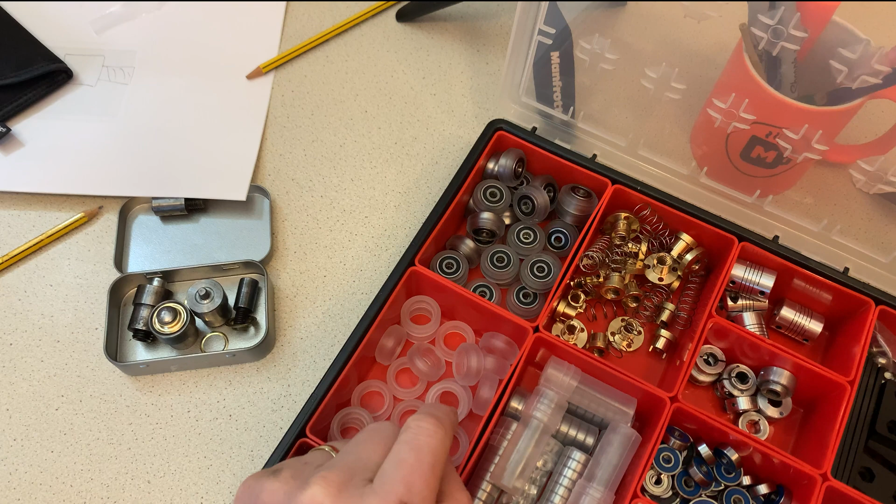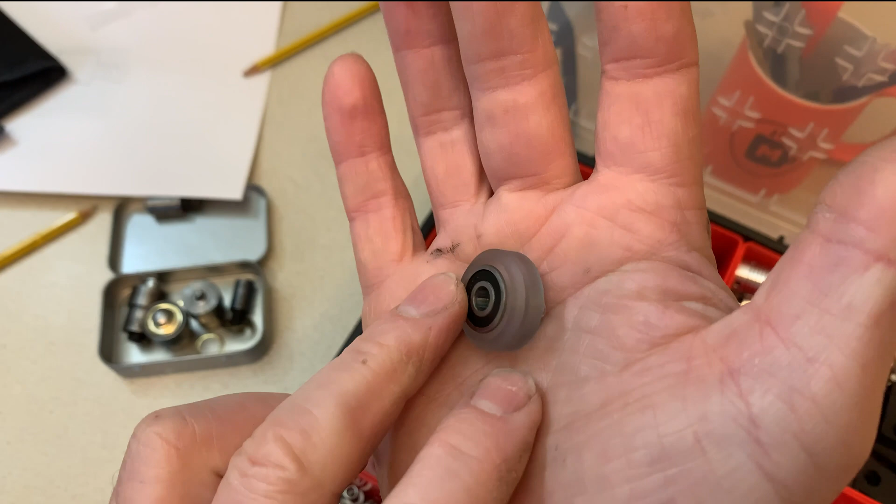You may have seen in an earlier video I'm making a small CNC mill, so I'm getting the bits together. Ultimately some of these wheels will be used on the device, and they comprise of a plastic wheel like such.

Very hard plastic, a couple of bearings - get these out of a box, there you go, a couple of bearings. And what I'm told is called a precision shim. Basically it's a 1mm thick washer, but not just pressed steel, it's precision, shall we say. It's 1mm, and that goes between the two bearings in the wheel. I'll show you how they suggest you put it together.

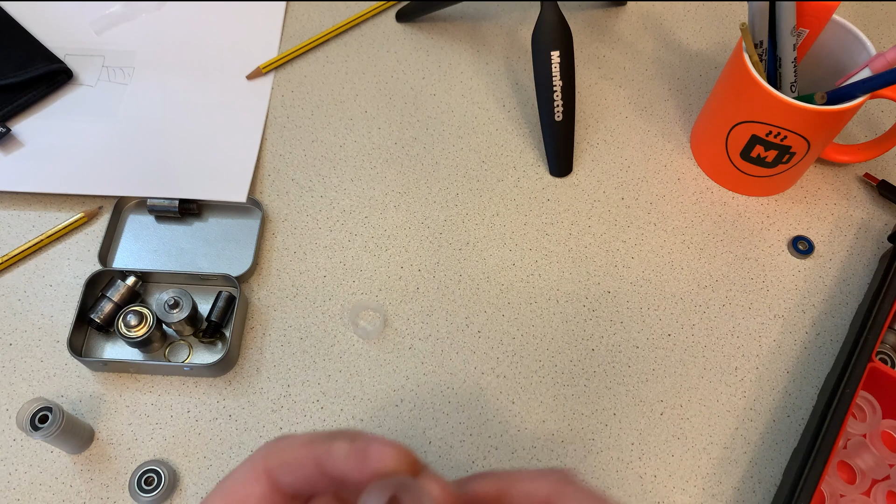Let me move that out the way a tad. Right, one bearing, one wheel. Let's get a little bit closer for you. Right, they tell me you put the bearing on the deck, wheel on the top, press down. That seats the bearing in, which is all well and good.

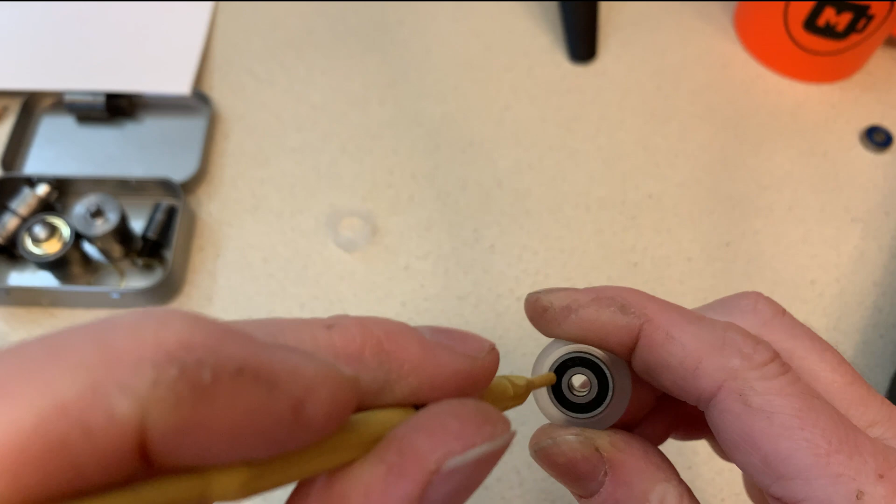Precision shim in next, then another bearing straight on the top. Ow! And with a great deal of pushing it all clips in, all very nice. The shim in the middle normally goes a little bit astray, but that's easy enough to straighten up with a screwdriver or some other pointy instrument - push it to the center and push down again. That's one wheel made up.

Now I've made 24 wheels up and I nearly had broken thumbs. It really is a lot of pressure to push down on there. The plan is, I've had a few little inquiries about making the CNC mill, not on a business level, but making a few for friends who've inquired. So I'm going to have more than a couple of dozen of these to press out.

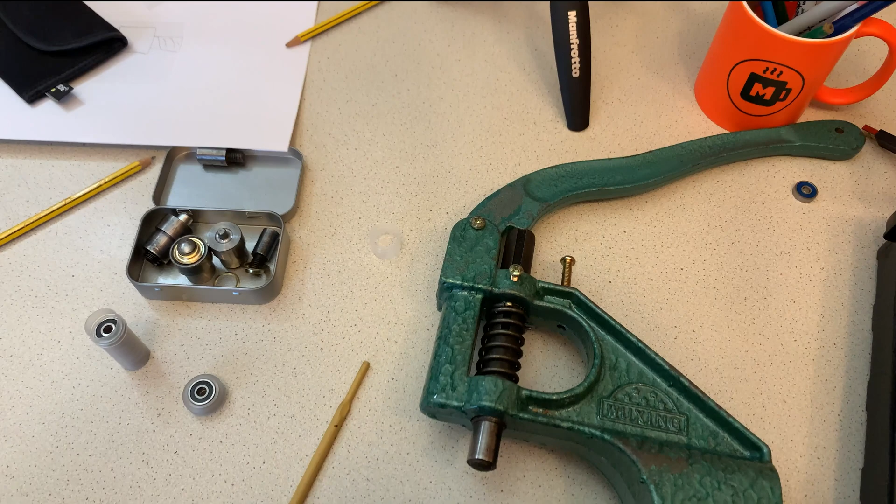So I'll bring this thing in, a little press I bought off eBay. Let me just zoom out for you, see if we can see it. Now I bought this in the summer, not for anything to do with this at all. It's for pressing eyelets into canvas material.

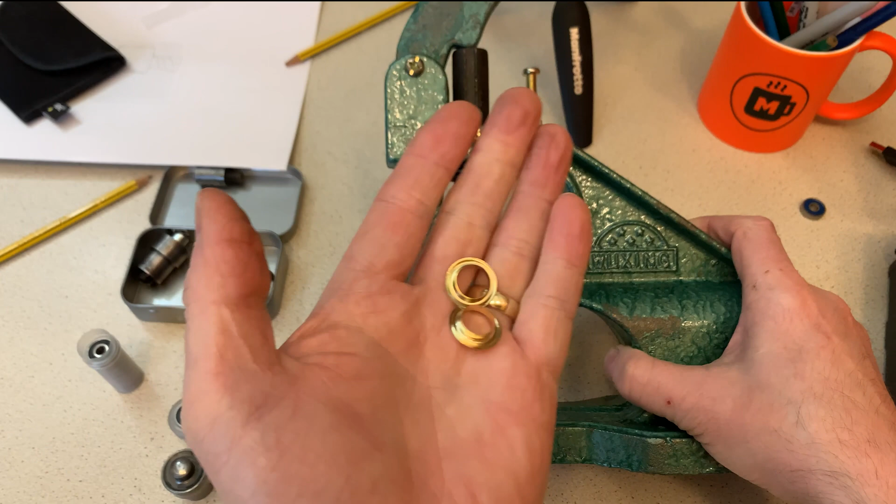To stop them being pulled out, you tie the canvas down or the sheeting down, and it helps protect the material - the rope wouldn't just rip out. Now this cost me, I'm laughing, this cost about £7 off eBay, so it's throwaway money. We did what we wanted to do with the eyelets, they're fine. But that brings me on to where the video's coming from today.

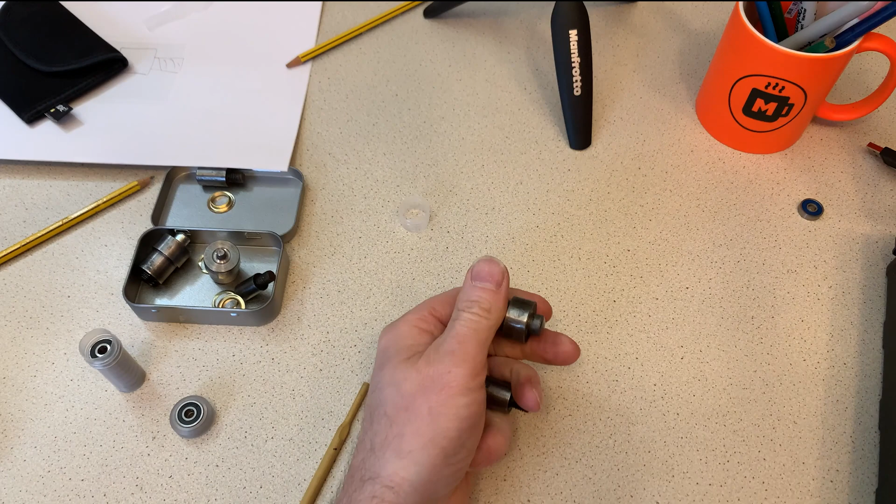It comes with a few little dies here. You pop them in and change the heads, depending on the size of the eyelets you're using. It came with 3 different sorts. But let's get that out of the way. Now what I was thinking - go back down again, there we go - I can make some new ones of these up so I don't destroy the machine, because I still may want to press some more eyelets in the material.

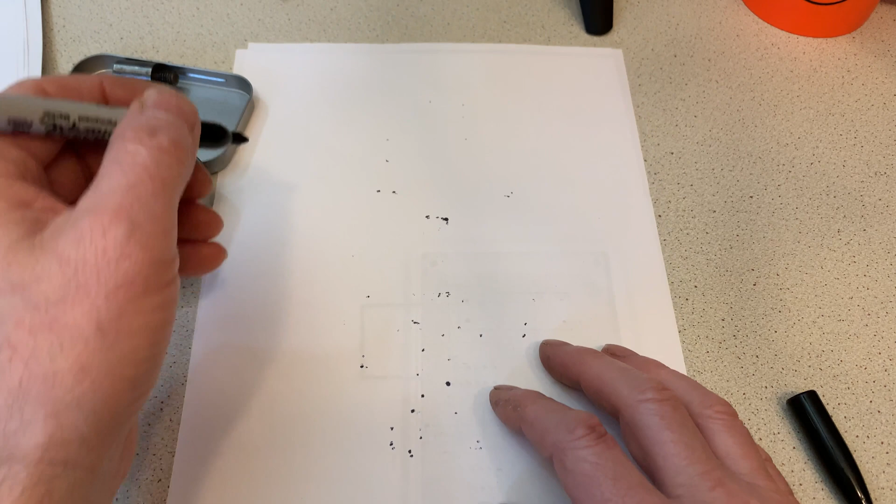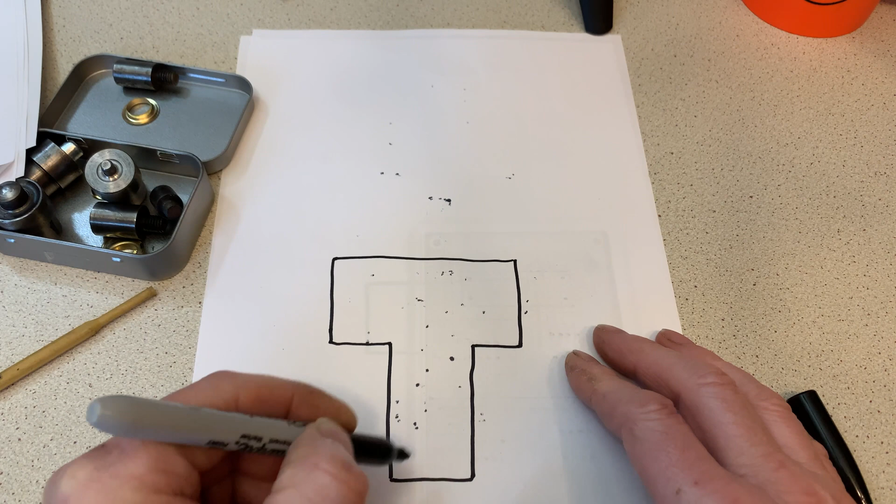I'm going to make a couple of these up to suit these wheels and do a little diagram. It's going to be similar to the dies that came with it, but I want to make it out of aluminium so it's a little bit softer. It's not drawn to scale at all. There'll be the lower die, something along those lines, no thread on it, that'll just drop into the base of the machine.

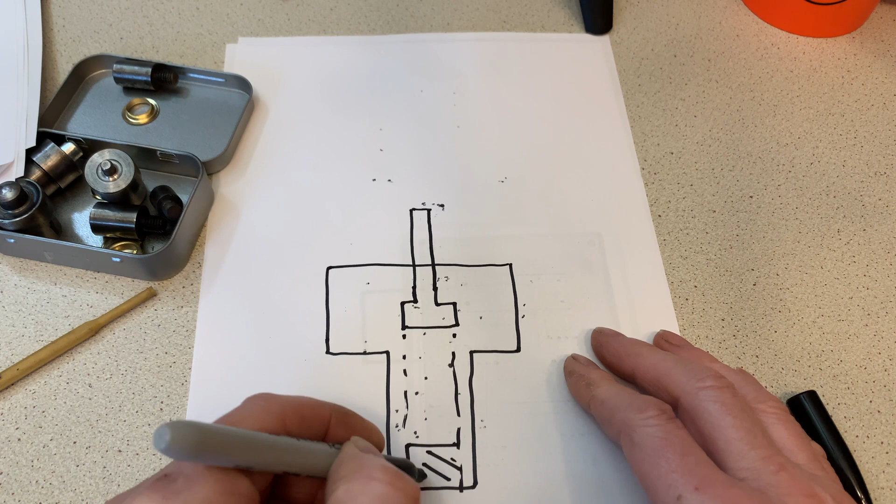I'm going to drive, or have, a 5mm pin running up the middle. That'll be on a spring. It'll be something like that. There's a hole all the way through to the base. This part will be threaded. Mr. Spring will live here. So when the upper die...

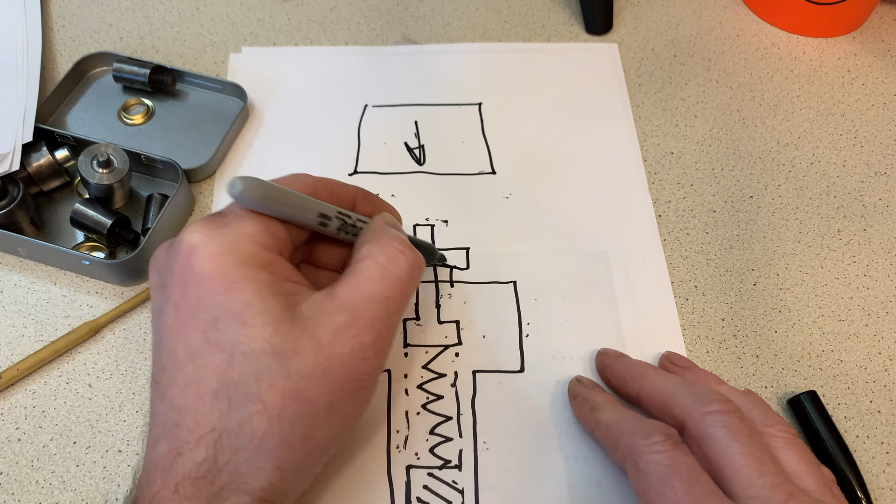...moves down, because that's what will happen - on this top assembly I would have placed one bearing, one wheel, the precision shim slipped over, another bearing sitting on top. Then this assembly comes down, pushes the pin down, but also compresses the two bearings into the plastic wheel itself, hopefully with very little effort from myself.

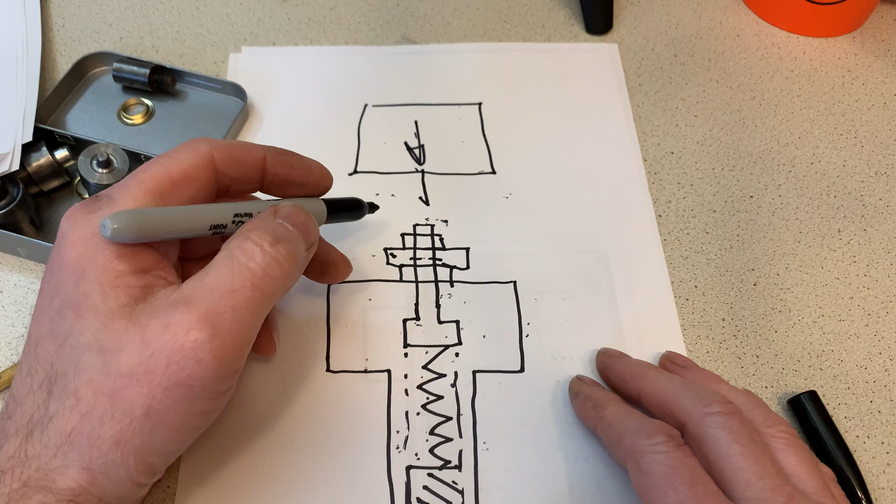So that's the plan. We'll head off to the garage, see what aluminium scrap I've got, and make a couple of bits up. Hopefully it's not going to take too long. I'll put the kettle on the way down, so it should all be good. I'll see you in the garage in a minute.

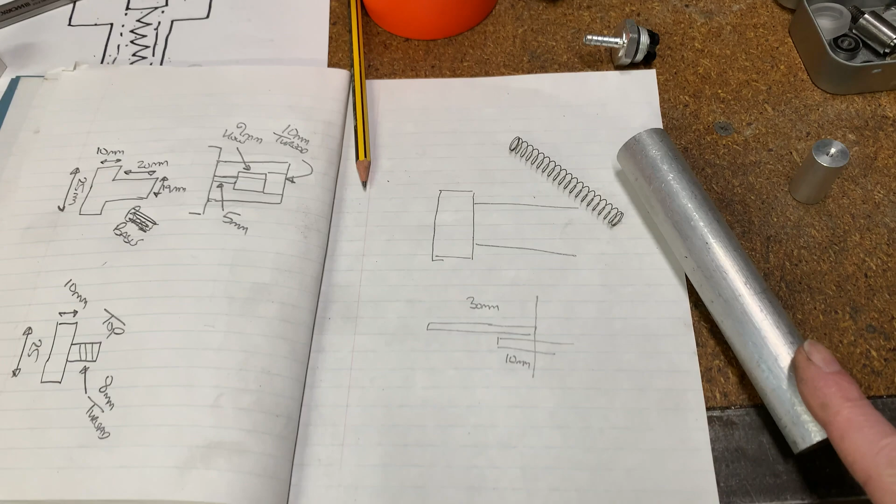Okay, we've got a bit of a plan. I found a bit of 25mm bar which I'm going to use as a base. I've scribbled out some little drawings here for the base, to give me an idea what I'm making, and the dimensions I need to machine it to on the lathe.

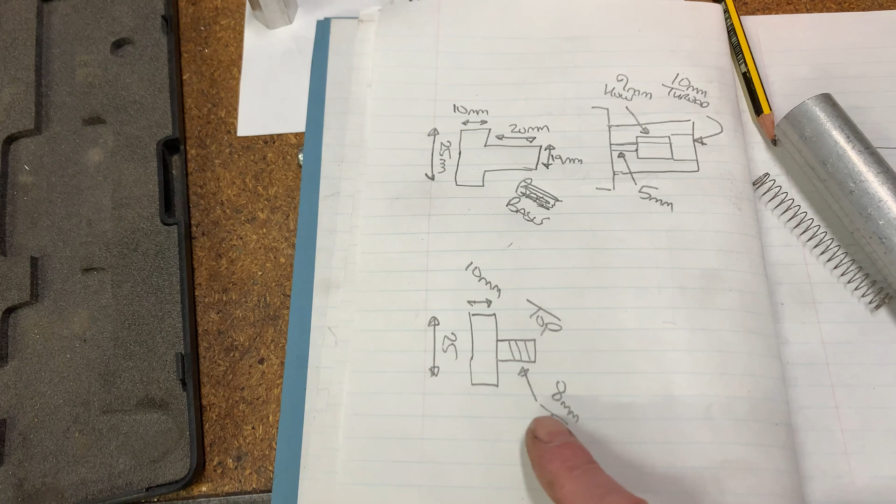That's the top part, I only need a little flat bit of aluminium. And a spring, of course. That's probably all we're going to need, except for a grub screw or a set screw in the base. So over to my lathe and let's see what I can do over there.

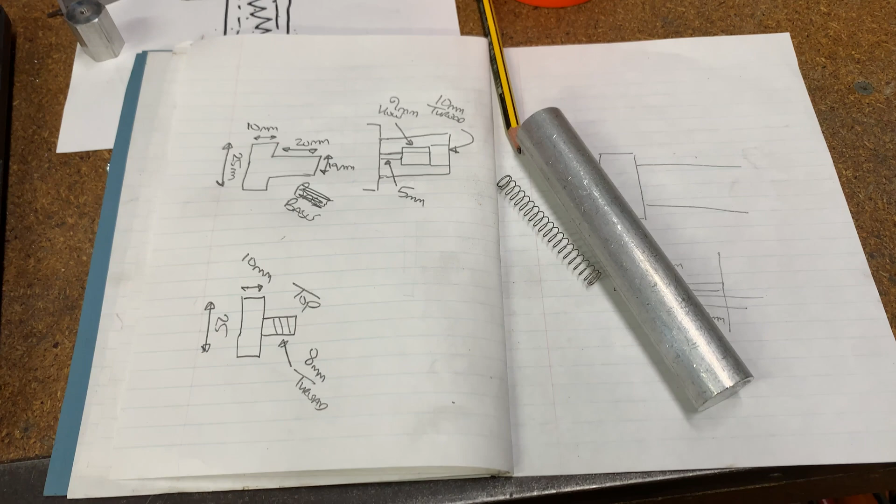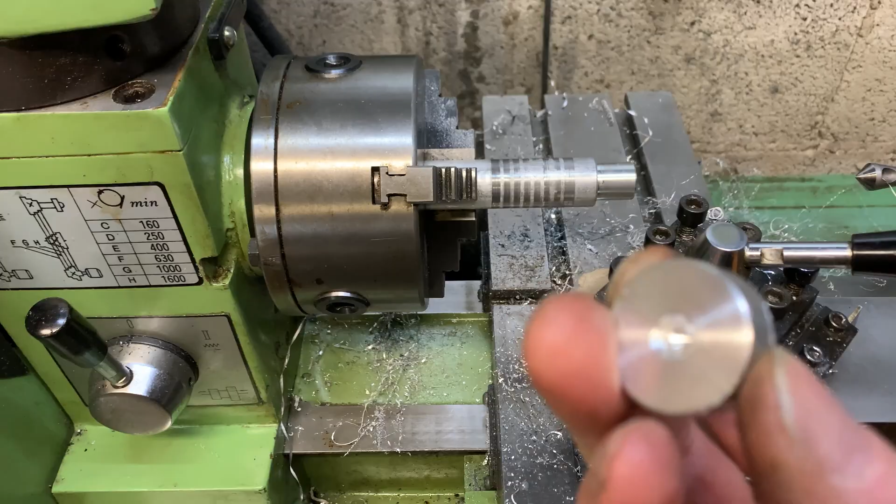Okay, as you can see, machining's underway. It's got to face that surface off. I've already put an 8mm tap in the end thread - that's going to form the top of the unit. This is the base, pretty much done it. I've drilled out 9mm, tapped to 10. It's going to be approximately 30mm long, so that should be about right.

I wanted to keep the video short, so I've done the machining off camera, but I wanted to bring you over to this chuck. In a previous video I called it an upgrade and took this chuck out, but I still use it because the keyless chuck I replaced it with is quite a bit longer, so I lose some of my centre distance. This gets swapped in and out, but this is the first time I've really used this one.

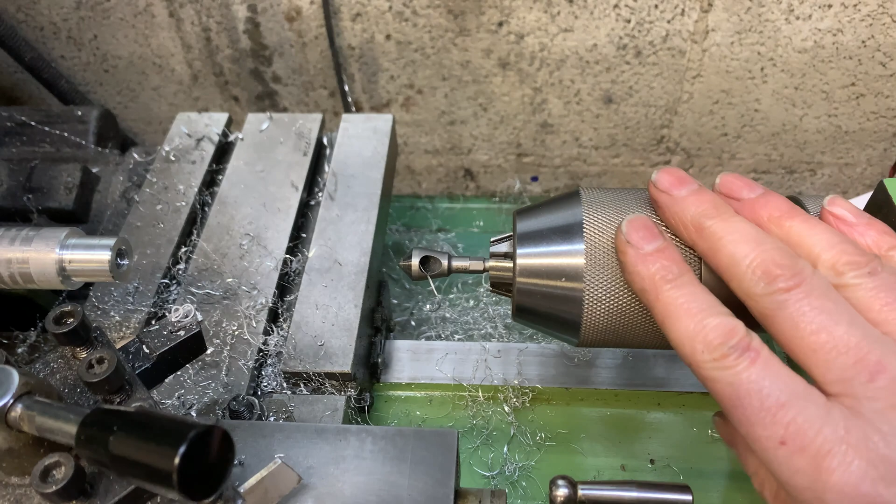I've been tapping with it, putting some threads in. That's a tap, you've seen them before, but this thing puts a death grip on whatever you put in there - not even a hint of the drill or the tap turning. Very, very good. I'll put a link in the description. That was only about £30 delivered with the M2 Morse taper that came with it. Very happy with that. Anyhow, back to the machining.

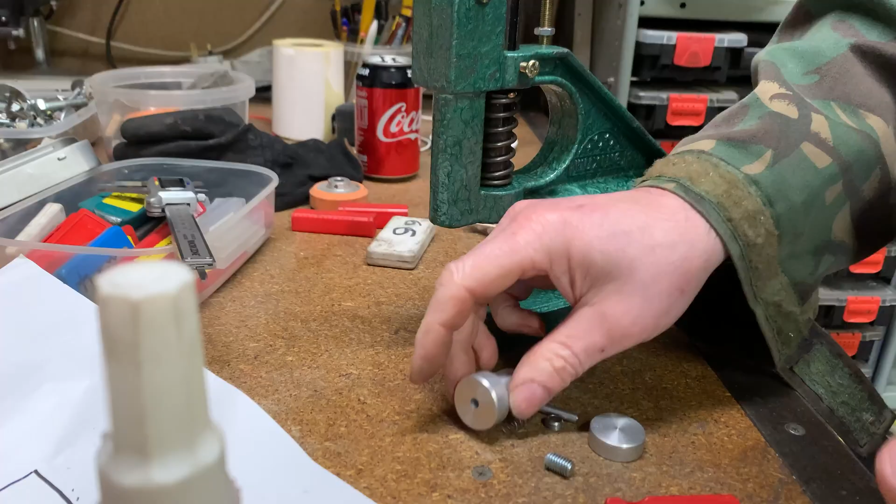I think I've just about done all the bits. As you can see, these are all just waiting to be put back together: 2 blocks of alloy, the bolt that goes up the middle, a little locking screw to hold the bolt, and the spring in place. I'm going to put a dab of Loctite to hold these bits together, otherwise they're going to fall to pieces.

This will pop into there, like so. Spring in there. Now it's a hollow bolt because I needed the shaft of the bolt to protrude from the bottom - it's a bit tight for space. I'm just going to put some locking compound on this because there's not a lot of thread going on there and I don't want it to fall out.

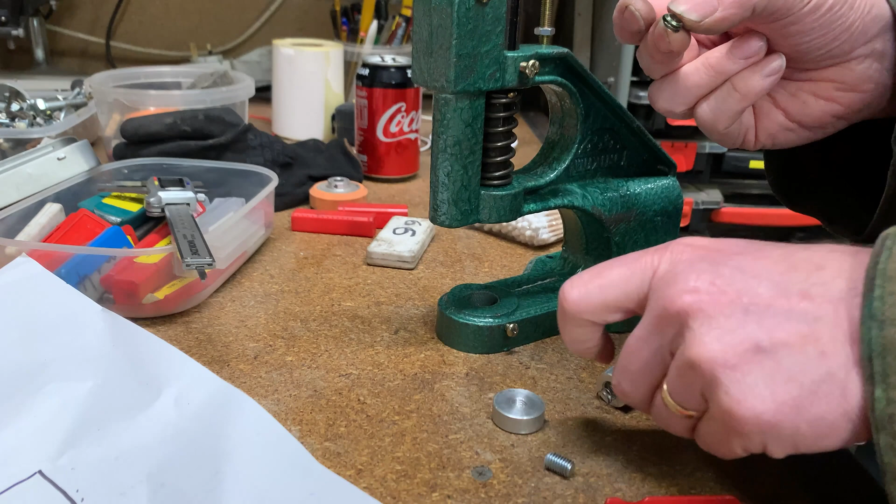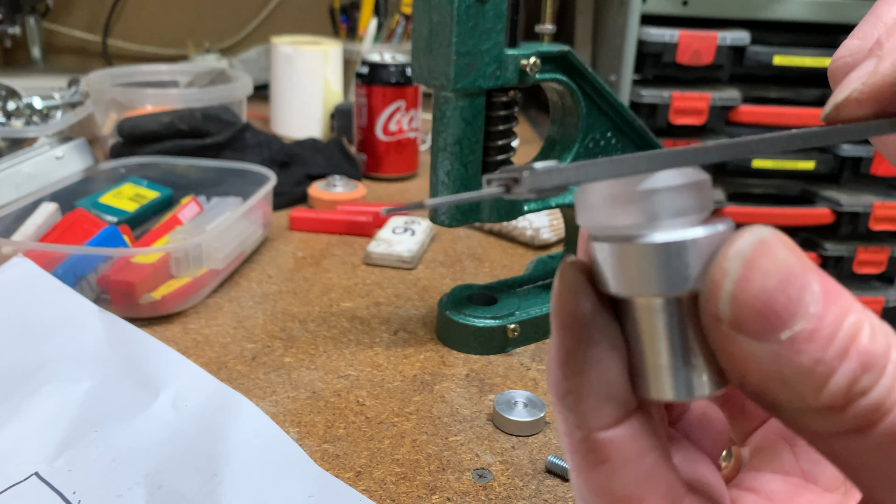Let's just see if we can get that in there, taking all the glue off. See, when you push that, I get a little bit coming out the bottom, but that's not a problem, so long as it compresses lower than the thickness of the bolt, which it should do. Let me see if we can get that on shot - imagine I'm closing the press. There you go. The pin does protrude a little bit from the bottom. That doesn't matter, but obviously if this didn't go down all the way, I wouldn't get full compression on the bearings. We'll give that a couple of seconds to set up.

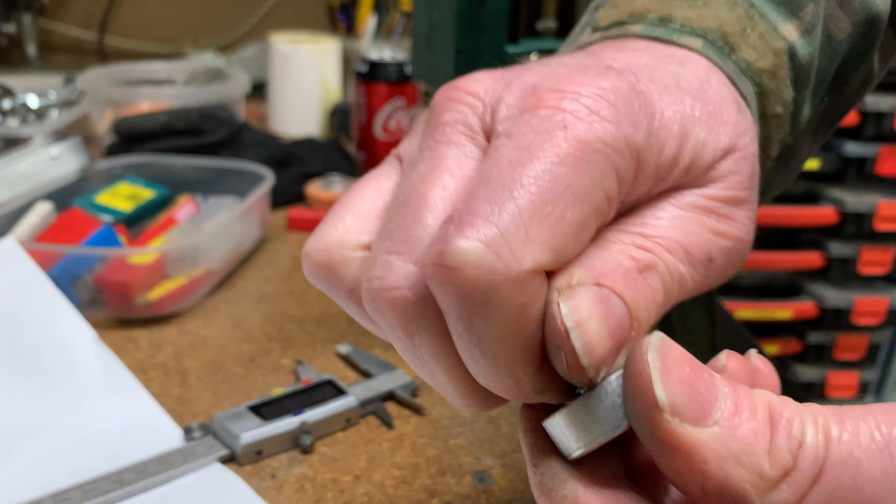One more bolt here, I hope this is in shot. Just coat there - that's the top part of the press, and this will thread into it like that. I'll just take that over to the vise, nip that in, then that part screws into there. We'll give that a couple of minutes for the glue to go off, then I'll come back and show you it working.

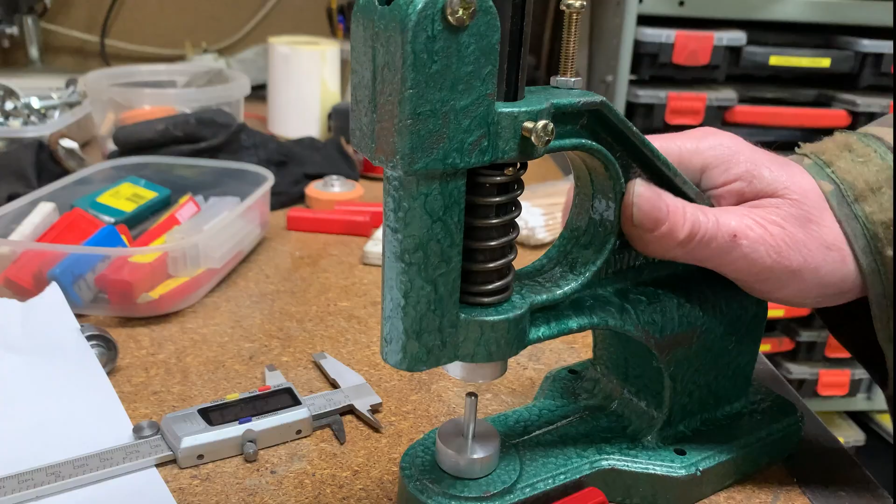Okay, there it is, put together. You can see the little piston will bob up and down - got the compression there like I want. There's an adjustment screw here which I've adjusted to prevent crushing the whole assembly. Basically how I've adjusted it - drop the arm and there's still a little bit of movement in the roller, or in the wheel. Only a fraction, but at least I know it's not being crushed.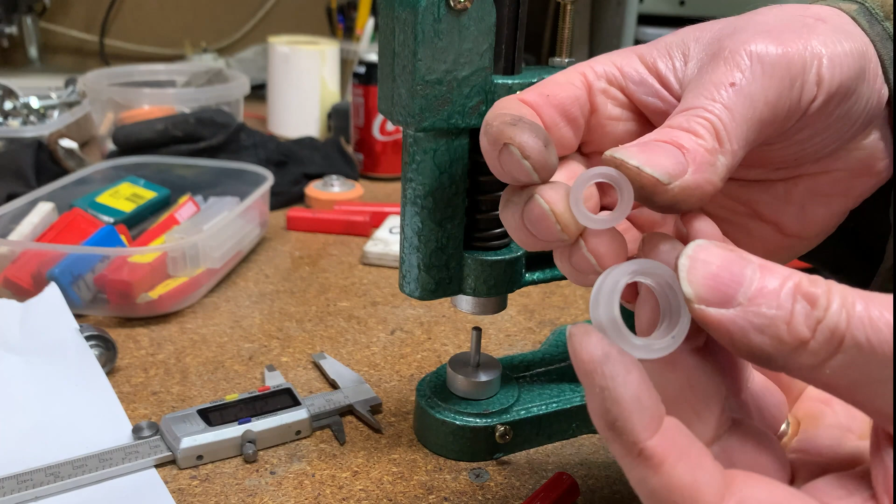There's two variations of the wheel that I've got - you've got the normal Xtreme wheel and there's a mini Xtreme wheel. I'll put links in the description. Well, let's see if it works.

Let's build a bearing assembly up. The whole idea of this is you can't go wrong, so let's see if we can. Bearing, wheel - I've got to put one of the precision shims in, probably easier to put on before the wheel, but there, nevertheless. Another bearing, just to line it all up.

Let's see if it works. One press. Look at that, I've impressed myself. All done, job's a good one, didn't hurt either thumb. Let's try on the smaller wheel.

Should work just the same - they're the same thickness, same width wheel, so I shouldn't have to adjust anything. Bearing, shim, wheel, top bearing - just jiggle it into place, make it nice. Down we go. Now it looks as if I do need to adjust that slightly, the adjustment screw on the press, because the wheels haven't fully gone home.

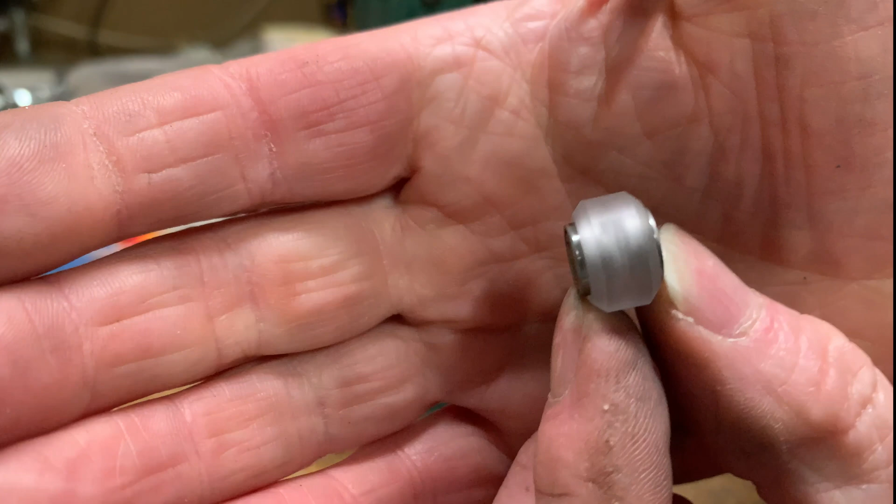So certainly if I need to go from one wheel size to the other, I will just need to tweak the adjustment screw at the top on the press. Let's see if you can see what's happened there - hopefully you can see that, the bearing's not fully gone home either side. That's just an adjustment on the press - on this one it was adjusted correctly. Bearings are always slightly out, never quite flush with the wheel outside, so that's how it would have happened if I pushed it with my thumb.

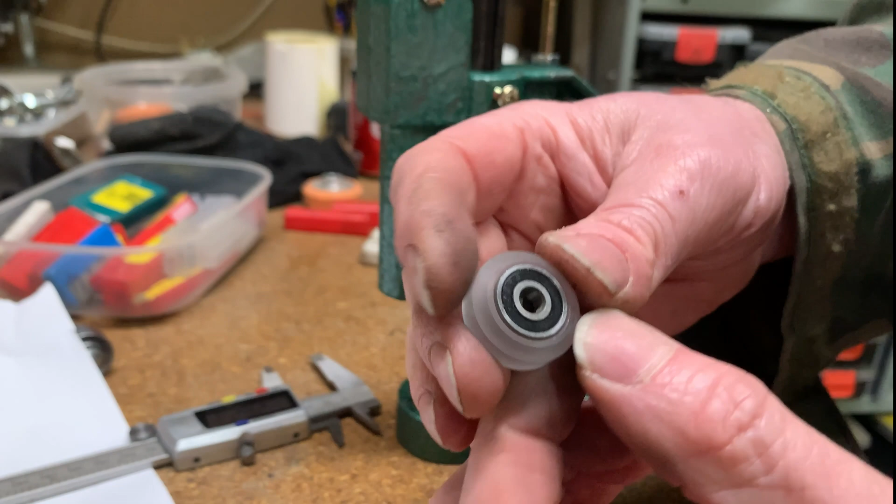As I said earlier, the shim in the middle doesn't always align, so you just need to pull that into the middle. I'll put that back on the press, just see if I can hear it click. I think I'm going to have to drop that down a tad, just a fraction. Let's try that - it should pinch the shim in the middle. Still not quite doing it, so I need to go a tad more, but I think you get the point here.

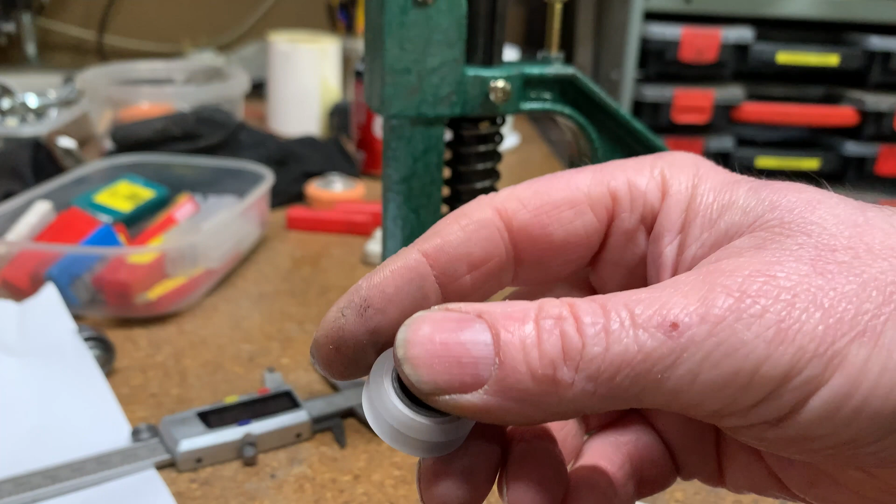Rather than breaking your thumbs, it's just a nice easy method of doing it. See if that'll work now. Yep, that's captured the shim in the middle there. This video is probably only relevant to people building these wheels up for maybe CNC mills etc, but it certainly saved my thumbs.